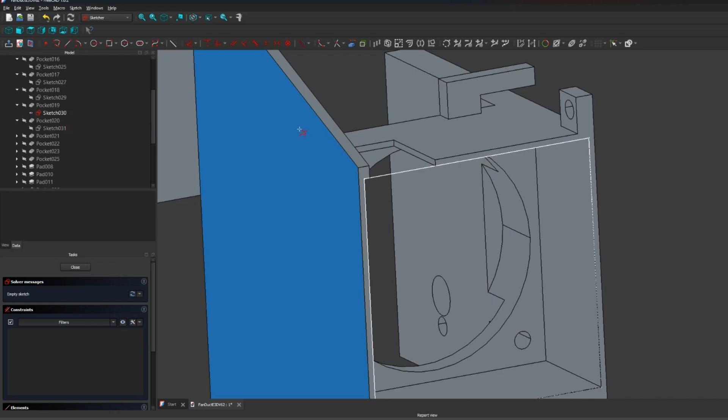Here is my project with a hotend cover. It's not perfect and there's plenty of room for improvement, so today I want to fix it a little bit. One of many things I want to fix in this model is the holes for the fan.

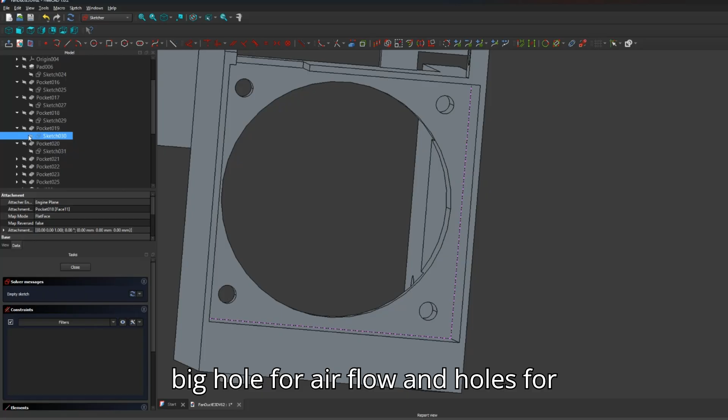First there is a recess for the hot-end cooler, a big hole for airflow, and holes for fasteners. The problem here is that the airflow hole and fastener holes are not linked properly to the recess. So if I change the position or size, I have to manually update the holes.

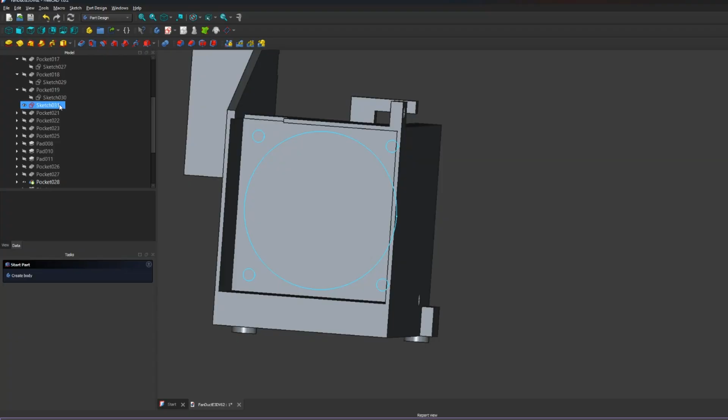This fix is actually easy. First I need to make a new sketch and copy the holes to it. Next, make the recess sketch visible and apply external geometry to the fan sketch.

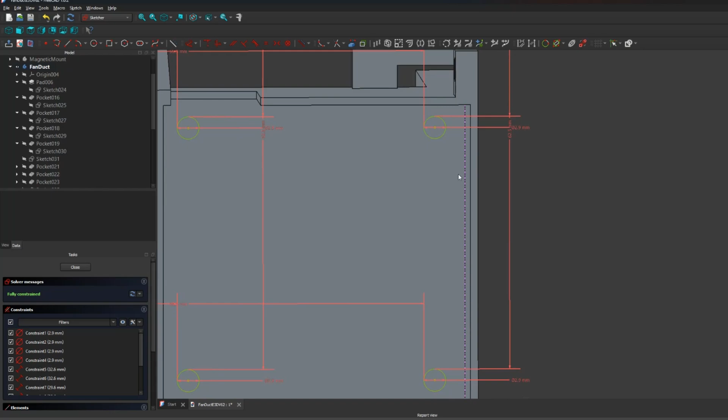Now I can remove all axis-linked dimensions and replace them with external-geometry-linked dimensions, and remove the air hole; it has to be moved to another sketch.

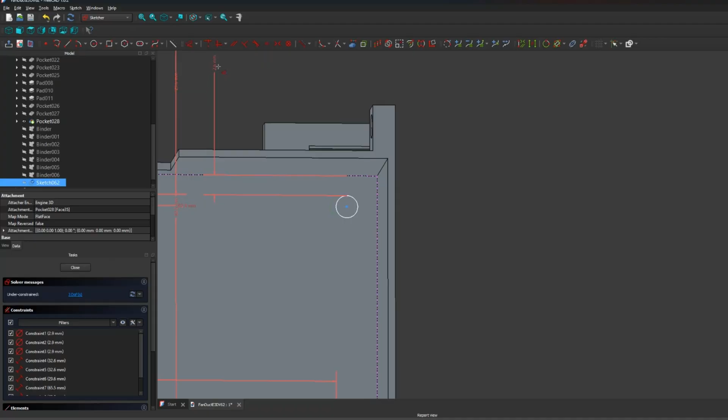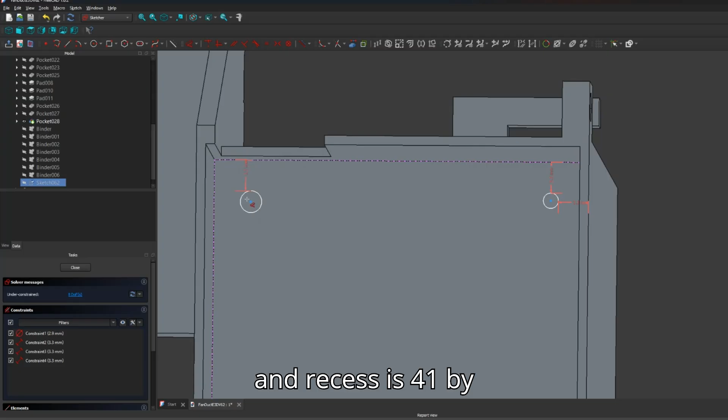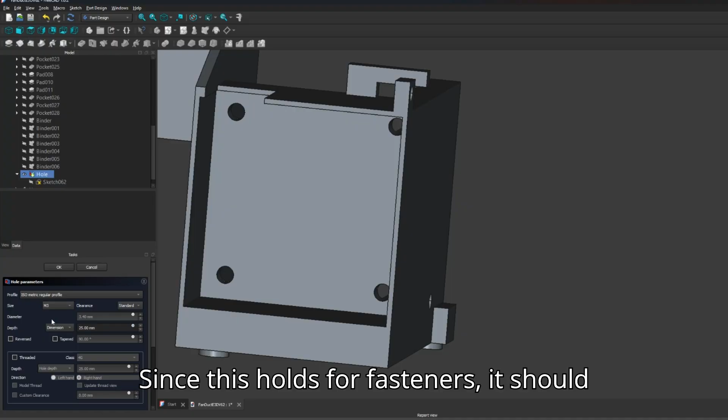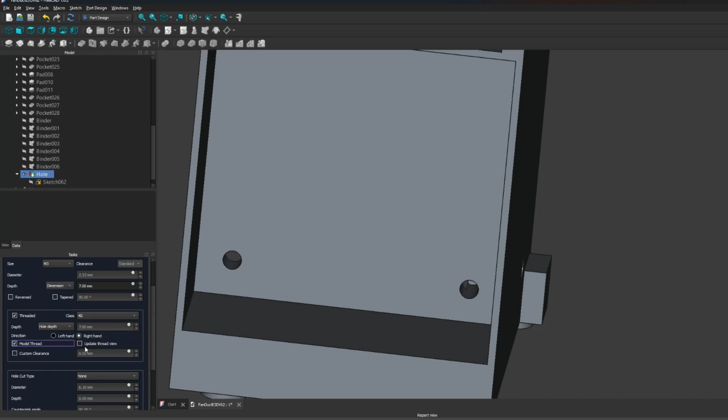Since these holes are for fasteners, they should have threads. I'm going to use 3mm bolts. Select the ISO metric profile. Type of bolt is M3 and 7mm deep. For some reason it didn't work the first time, but after some wiggling I got my threads.

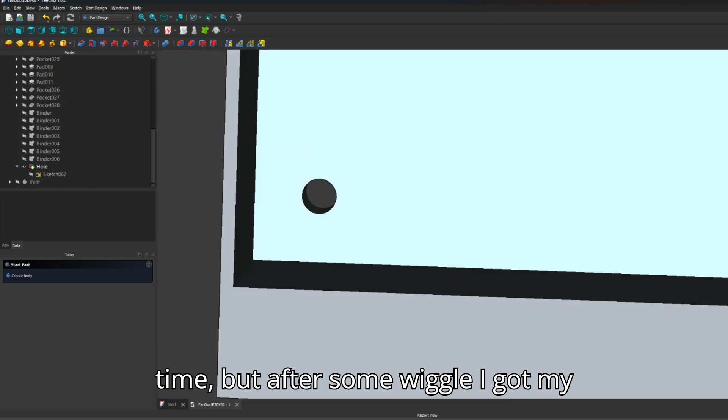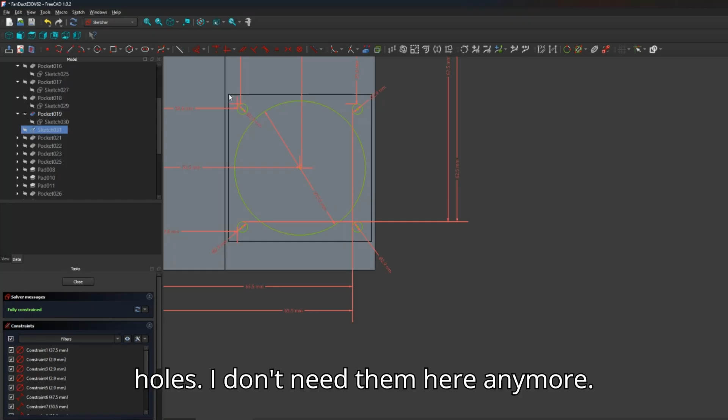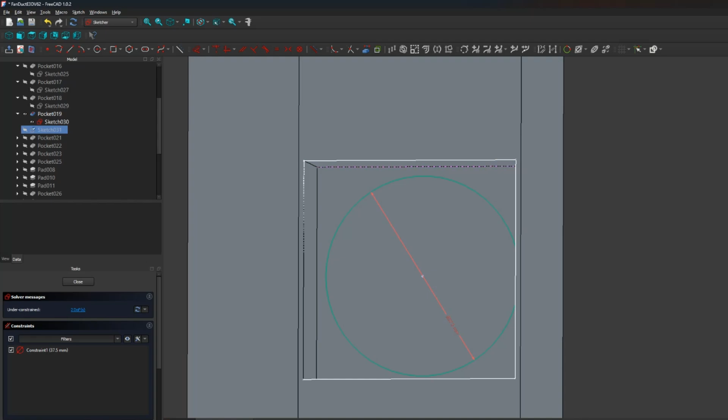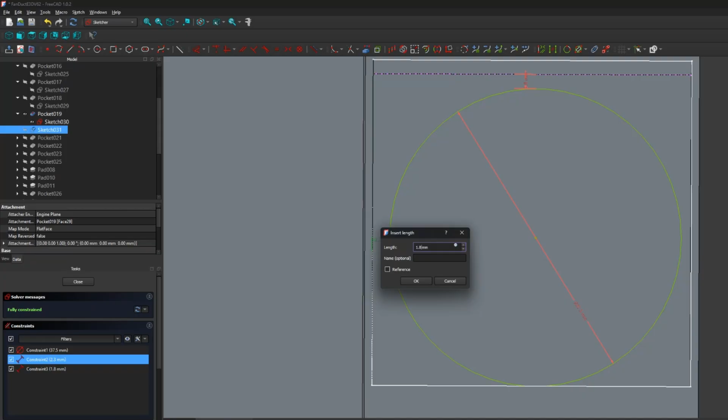Now to the air hole. I just removed the fastener holes, I don't need them here anymore. And again, external geometry. Some dimensions, just to ensure it's centered. And now it's time to use the hole tool.

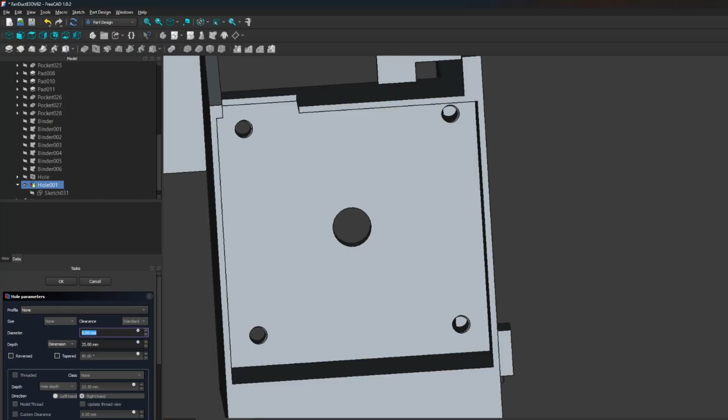Looks good. Now I can make changes to the recess without worrying about the holes. Same problem with the holes for the blaster cooler. To direct airflow, there will be a part connected by magnets.

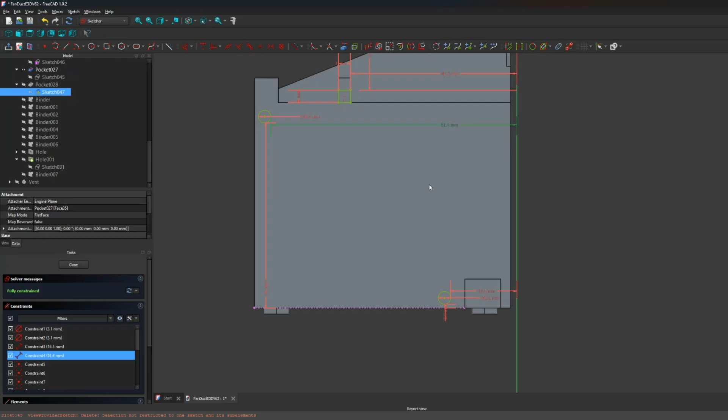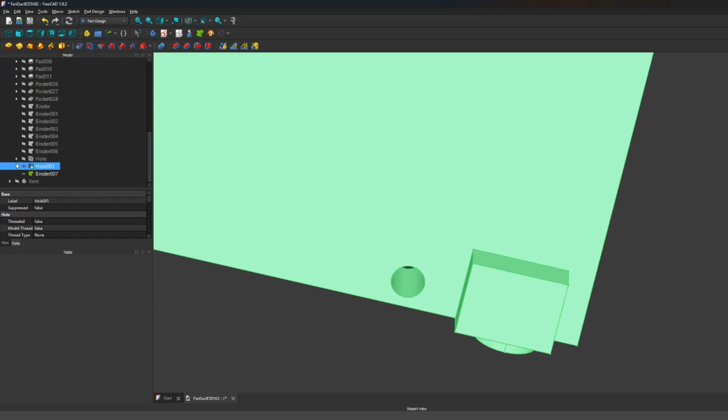The cooler extrusion should be at the bottom of the cover, so I'll link it to the edge. The cooler is shaped like a snail, and the airflow will be directed downwards, so I'll link the holes offset to the bottom edge of the cover instead of the axis.

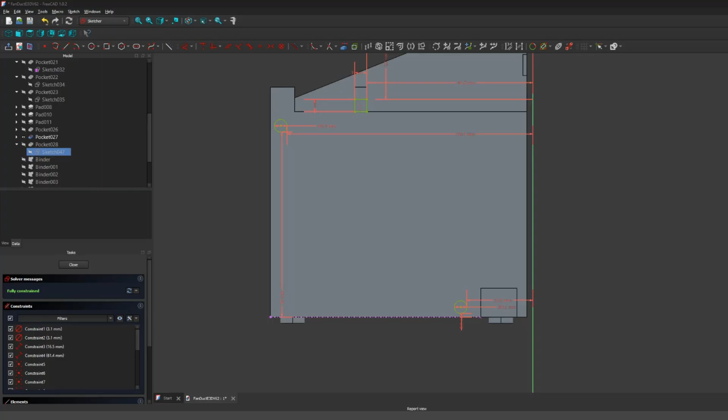And here I'm like an idiot trying to sketch on the inner plane. For some reason I thought that view section mode won't work.

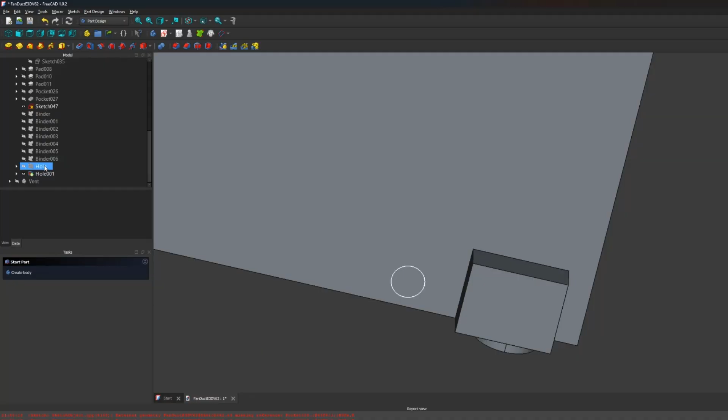Sometimes there is a problem with making changes to previous sketches. In such cases, removing the change on top of it and applying it again might help; if not, just copy the objects inside the sketch and paste them to a new sketch on the same plane.

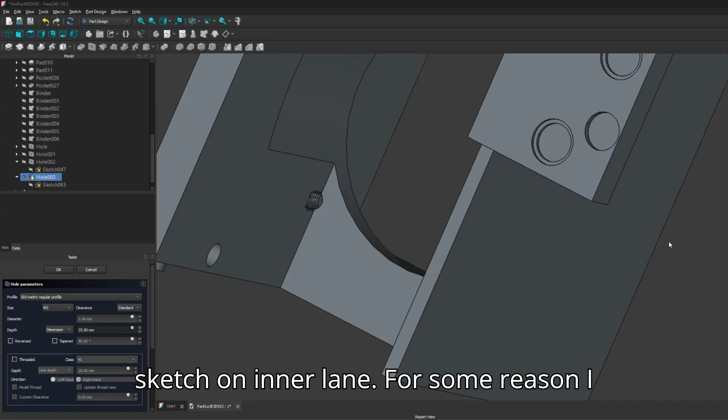And here I'm like an idiot trying to sketch on the inner plane. For some reason I thought that view section mode won't work. After a little suffering I finally tried and it worked. Successfully added a recess for the bolt head.

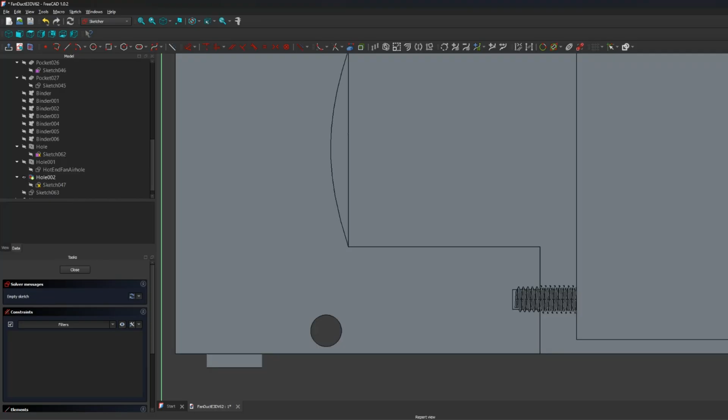That's all for the current fix.